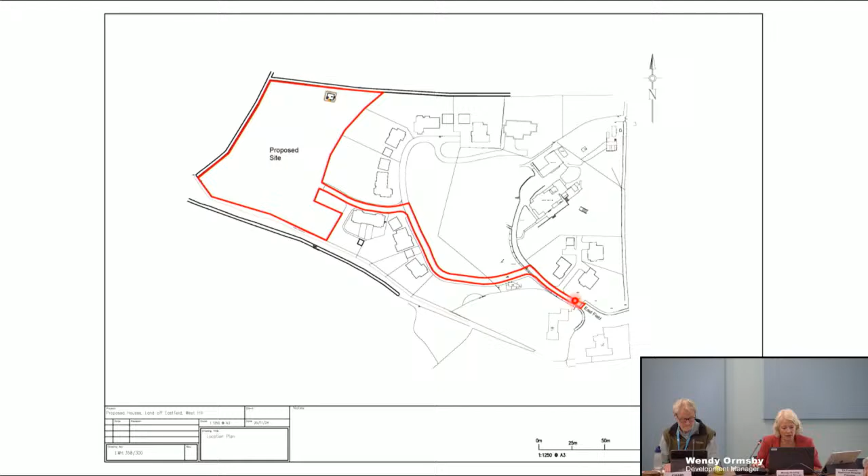This application, when submitted, is now accompanied by a detailed arboricultural assessment, and following some amendments and further reviews from the council's arboriculturist, they do not object to the proposal.

The site itself, as we've mentioned, is outside the built-up area boundary, but there are footpath connections from the Hayes End development right through into the village centre. This just helps to show the location of the site in relation to West Hill and its facilities.

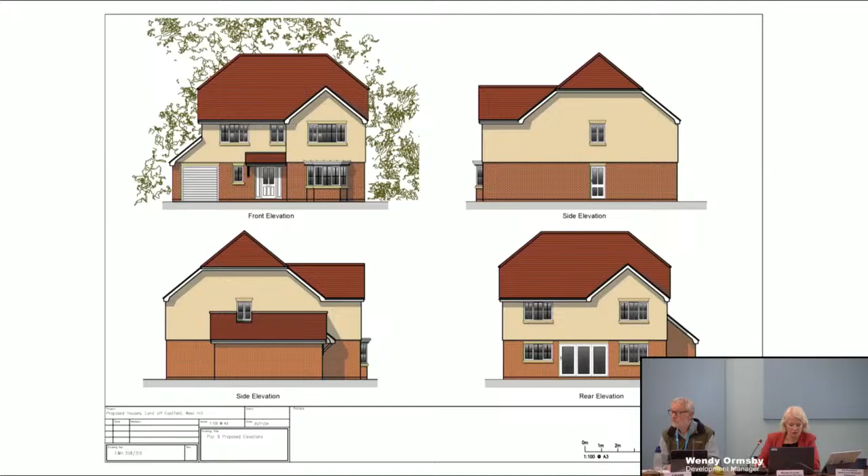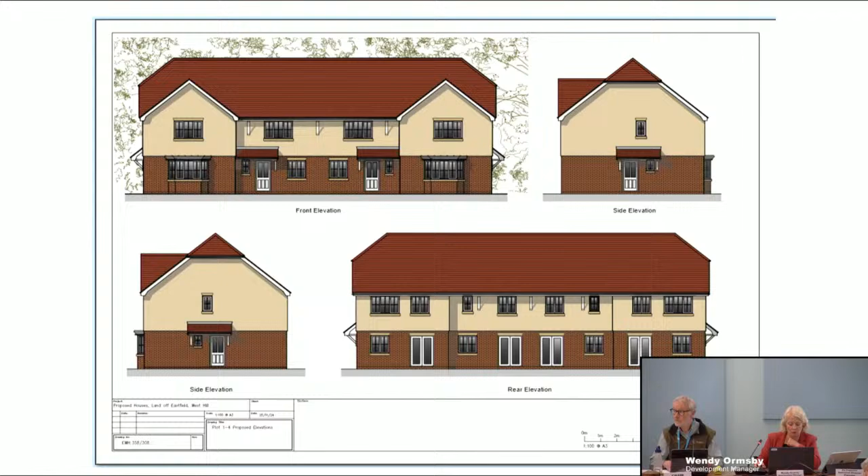So again, that was one of the 4-beds, and this is the row of terraced affordable homes. So 2 with entrances on the front, the other 2 with their entrances on the side, and all with patio doors out onto gardens. The middle ones are 2-bed units, and then you've got 3-bed units, so a bit of variety there in terms of the affordable offering.

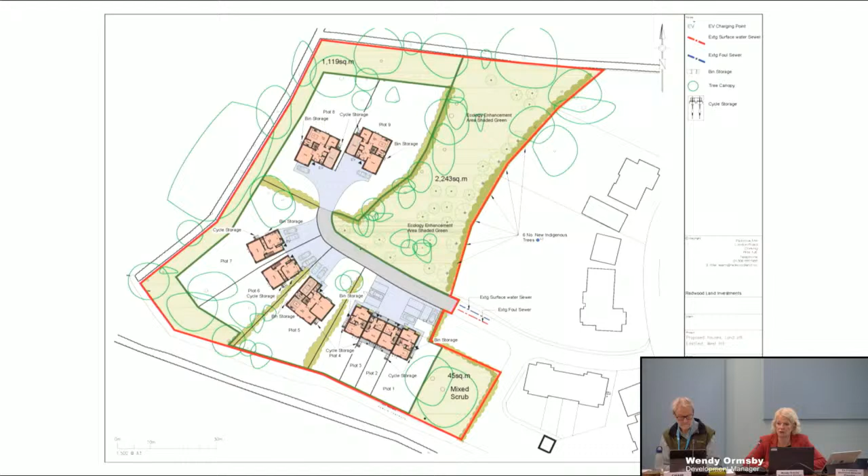So I don't know when that sign was erected, but we have a recent arboricultural detailed assessment of all of the trees on the site, which assessed their health and categorised them, and identified that there was one tree which was in need of felling. So I think we can be confident that assessment has been undertaken, and the health of those trees has been assessed by a qualified arboriculturalist.

So it's not quite as sustainable as you suggested. Thank you for pointing that out, members. I think, obviously, with that added element of the route, it's still probably a closer walk than many other parts certainly in the southern part of West Hill.

If you can get the pictures up, the pictures do really show you where all these trees are up there. It is an important site for bats, etc. And I'm not the biggest green eco warrior, I will say we have to find a balance, but I do think that this is not a balance. This is going too far the other way, and I am staggered that the arboricultural expert thinks that you can get those houses in there and not have future pressure on them from the residents.

You know, in your house, you want a little bit of light, and even though they're pine trees, it's dark in there. There's a bit of grass growing in there, but there's a lot of areas where there isn't proper thick grass. At worst, I would call, like Councillor Howe did earlier, for a site visit.

But I cannot support this as it shows on the plan. I think at the end of the day, we have to find this balance between protecting the environment and building houses. And we have pushed for houses in this area. We have upset residents, which I know we do all the time, but we've upset residents up there, in the fields right next door to this, green fields, where we have filled them with houses. And I agree that it is sustainable and all the rest of it, but this is definitely an area that just didn't feel like you could put, well, one or two houses in it, let alone the amount we're talking about here. So yeah, I can't support this as it is, I'm afraid.

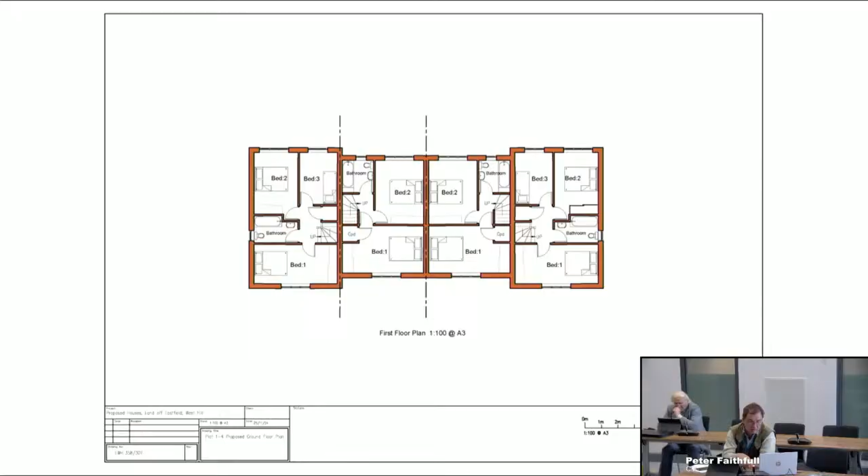Okay, well, in fairness, the proposed layout plan does show the root protection areas of the trees in relation to the houses, but I can agree with Councillor Barlow that there could be future pressure from inhabitants, although the tree officers seem satisfied now with the location of them, that won't happen.

Any other speakers? You're going to come back again, Ian? I just want to say, is it correct that this site is of national importance to the bats and things that feed up there, and the dormice and everything, and it's right pushed up against the road. You know, it's like we've built all the way up and we've given it this buffer, and now we're going to take that little bit of buffer away for the sake of a few houses.

You know, it's not in the new local plan. It wasn't in the last local plan. We've turned it down twice before. Now, because of the tilted balance, we're coming back and we've got to squeeze these houses in there at the loss of the wildlife that we have squeezed to a very small area.

And it's all very well the developers saying, oh, we won't have any lights outside, but all these houses, I'll guarantee, will have big windows in them because it's dark in that place anyway. So you're going to want to try and let light in your house. And then when you turn a light on at night, what happens? You've got a dirty, great illuminated thing that will affect the bats and the feeding up there.

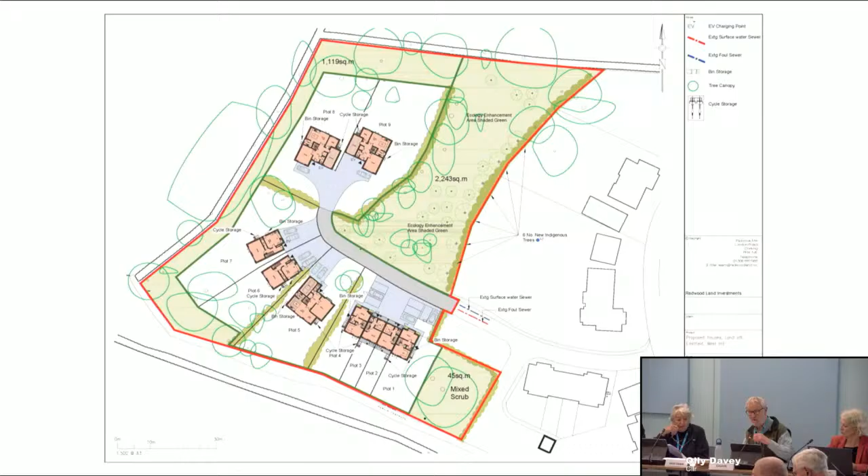Okay. Do you want to propose that? I mean, it does seem like maybe it's a site we should take a look at.

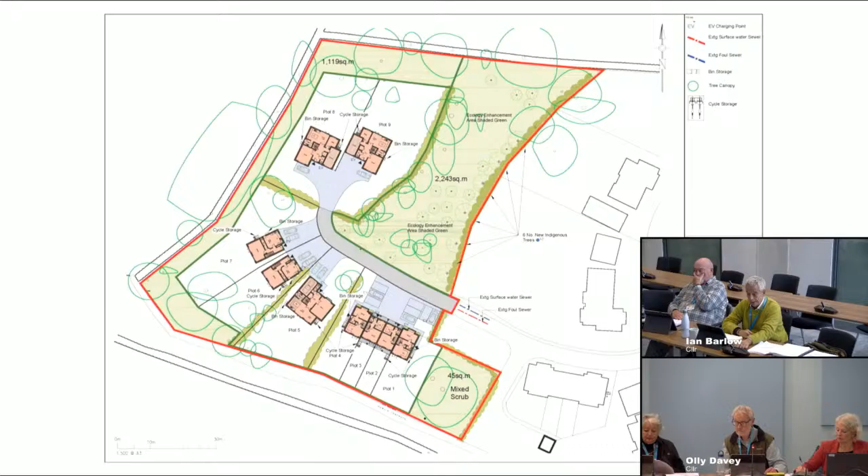Happy to propose then, Chair, that we defer for a site visit. And again, perhaps we could have the arboricultural officer up there to explain exactly how he thinks he can do it. Because, as I said, I didn't go on the site, it's a private site, but I stood at the gate, looked across it, and it just didn't seem possible to me to do that.

Yep. Do we have a seconder? Councillor Faithful, I saw your hand go up. So you'll second a site visit proposal. Okay, so we have a proposal for a site visit.

We're going to be busy, aren't we? So those in favour of a site visit? Two, three, four, five, six, seven. I think that's unanimous apart from the chair and vice chair. I'm abstaining. Yeah. Okay, so we'll defer that one for a site visit then.